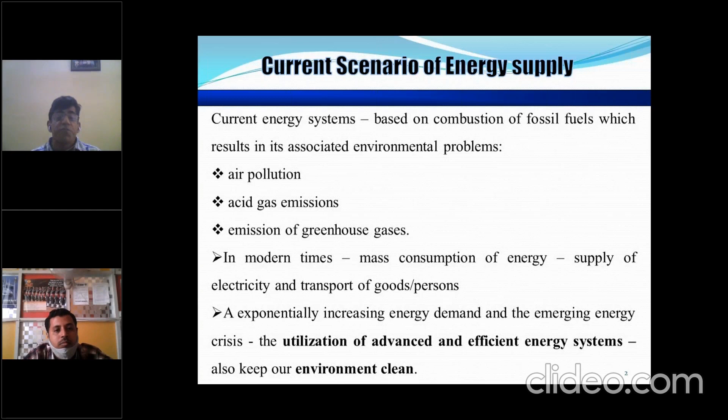So if we just see future fuels and electricity, I have classified into two categories. One is now. So now we are using fossil fuels, that is natural gas, petroleum, coal. We are using steam turbines, and we are using some combined cycles involving steam turbines.

So these are for limited usage now, and for the future, because many of these energy sectors which I just told are presently being utilized to some extent. Research is going on for commercializing these particular areas. So for limited usage and future, we have nuclear energy, solar energy, renewables.

Of course, a lot of renewables are being discussed, like wind energy, which is a renewable energy, that's what I discussed in the morning. So we have a distributed generation system, superconducting transmission lines, and other future fuels that can be used.

Then we have hydrogen from fossil fuels and water. Super grid is another concept, that is a transmitted grid over a wide area, so that electricity can be supplied in a proper fashion.

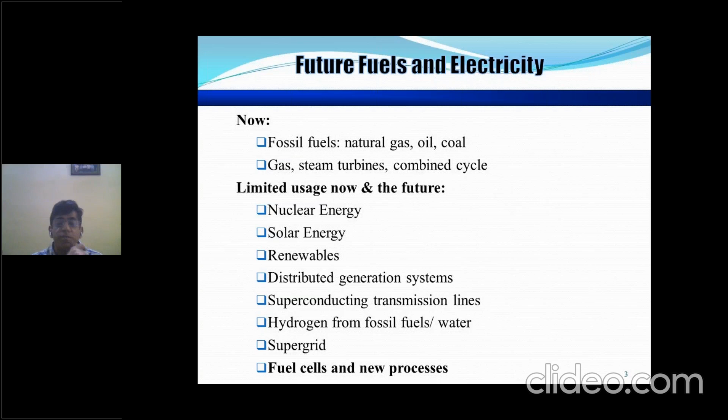So my topic is fuel cells and new processes. We will be talking about this particular topic, fuel cells and new processes. So what are the key drivers for fuel cell technology?

So the key drivers: first is increasing energy supply to meet the growing demand. The energy required is increasing, particularly in developed countries. The amount of per capita energy is increasing at a very fast pace. So we have to increase the amount of energy supply so as to meet the growing energy demand.

Second thing is reducing reliance on imports. Certain countries have an upper hand on oil, and we have to rely on imports for meeting our energy demands. So that reduction is required for oil imports, and for that matter we need fuel cell technology.

Then, of course, a very important parameter nowadays is environmental quality. For improving environmental quality we need reduction of greenhouse gas emissions, and meeting air emission regulations given by the various pollution control boards, those norms have to be met. So for that very reason we have these key drivers for the fuel cell technology.

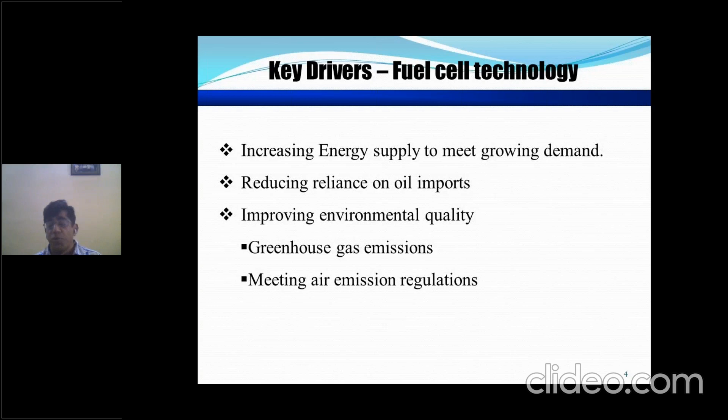Then, what exactly is a fuel cell? Just a straightaway definition: it is an electrochemical device that directly converts the chemical energy from a reaction between fuel and oxygen into electrical energy.

Okay, so what we have? We have chemical energy stored in a fuel, and that chemical energy of the fuel in the fuel cell, through reaction with oxygen, produces electrical energy that can be used. And of course, the only byproduct is water. There is no combustion of fossil fuels involved, so from an environmental point of view, this is a very acceptable fuel cell.

So then, why are fuel cells the emerging energy source? We have the chemical energy of the fuel that, by reaction with an oxidant or oxygen, produces water and produces DC electricity. Of course, if we need AC electricity, that DC electricity can be conditioned to form AC electricity.

So when I talk about an electrochemical device that converts the chemical energy stored in the fuel into electrical energy, another device that comes to mind is the battery. So what is a battery? A battery is a similar device; it also converts chemicals into electricity.

But the battery, you very well know, you use a battery in your car, you use a battery in your Activa or so, and that battery, after long usage, becomes dead and you have to throw it away or recharge it periodically, right? That is finished in the fuel cell. Fuel cells never go dead. The electricity flows out as long as the chemicals constantly flow into the fuel cell.

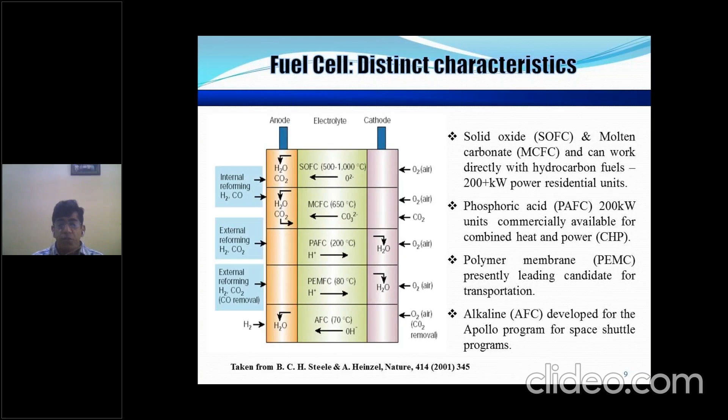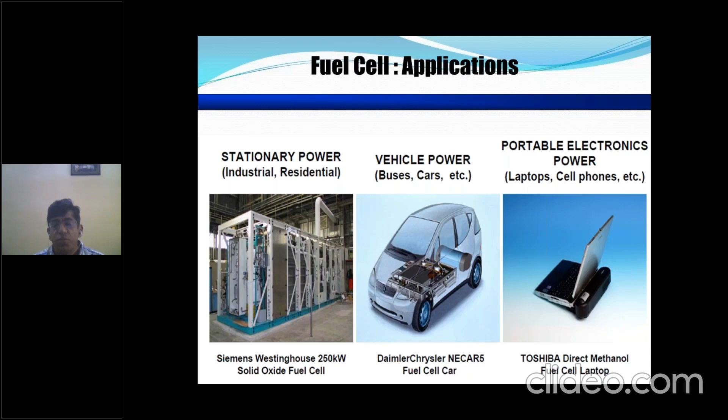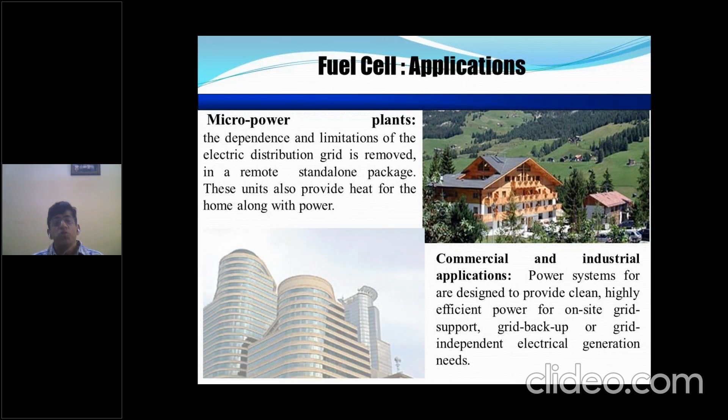Even for commercial and industrial applications, fuel cells are of quite significance. The reason is they provide clean, high-efficiency power for on-site grid support, grid backup, and even grid-independent electrical generation needs. They can be used as backup support or as a complete system for supplying power. Even military applications, where we need uninterrupted power supply systems, can go for fuel cells. So I'm talking about general fuel cells here.

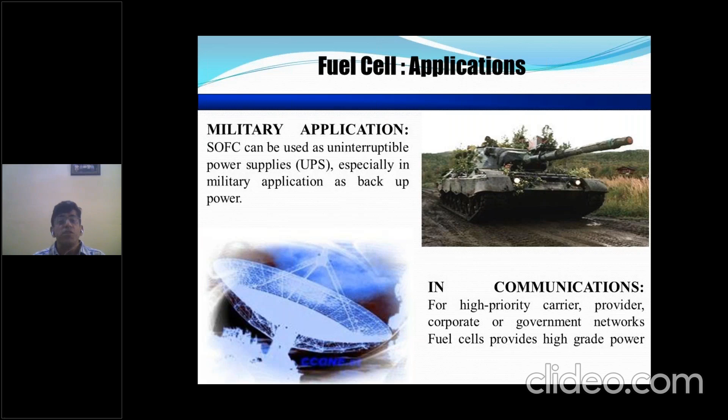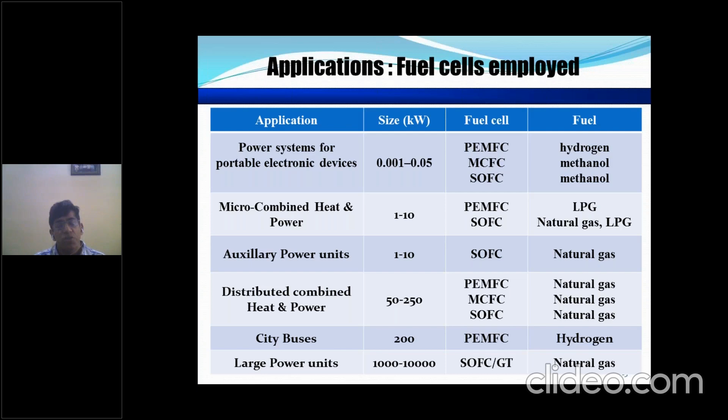So for city buses, we still use polymer electrolyte membrane fuel cells. I mentioned these are mainly used for vehicular applications right now, though the shift has been going towards solid oxide fuel cells in very recent times. For large power units, we can use SOFCs with gas turbine systems, and the most commonly used fuel is natural gas.

So now, why SOFCs over other fuel cells? SOFCs are a type of fuel cell which have an anode, an electrolyte, and a cathode. SOFC is one such type of fuel cell which has all components in the solid state - that is, even the electrolyte used is not in liquid state, it is also a solid electrolyte. That is one distinct advantage of SOFCs over other fuel cells.

For that very reason, it has no corrosion problem because the electrolyte is not a liquid, so there is no corrosion problem. Even there is no leakage because the electrolyte is a solid.

The other advantage is that the only byproduct produced in SOFCs is water. We can have off gases from other fuel cells which may even be harmful to some extent, so they are quite inexpensive.

I will just come to the slide involving the material of construction of SOFCs. Then we will come to that. They can be quite inexpensive, right?

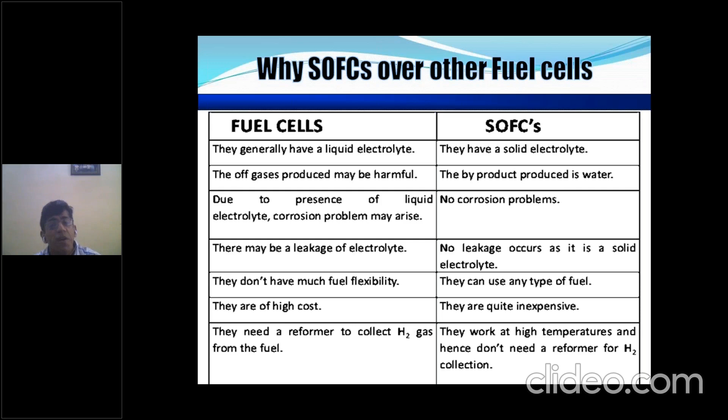The last thing is that they don't require an external reformer. This is because SOFCs operate at high temperature, so the methane or any other hydrocarbon fuel can be reformed in the fuel cell itself. This is referred to as on-board reforming of fuel, forming hydrogen, which is the actual fuel for the SOFC. So there is no pre-reformer required for SOFC. That is also one distinct advantage of SOFCs.

Another slide showing a comparison of various types of fuel cells. If you have a liquid fuel, upon evaporation that liquid fuel can directly be used in solid oxide fuel cells and MCFCs. Why? Because they operate at high temperature, right?

For natural gas, we have to first remove the sulfur content of the gas before feeding it to SOFCs and MCFCs. SOFCs and MCFCs have a thermally integrated reformer because of their high operation temperature, so the reforming takes place within the fuel cell itself.

As we go down, if we come to the phosphoric acid fuel cell, the first thing is we have to convert the fuel into hydrogen. Methane cannot be used as such as the fuel. And the carbon monoxide concentration fed to the phosphoric acid fuel cell should be less than 5%.

Lastly, polymer electrolyte membrane fuel cells require pure hydrogen as a fuel, and for that matter, the carbon monoxide concentration should be less than 10 ppm. So if we go down the series, we have an increasing complexity of the fuel processing, and of course, decreasing efficiency.

I have just shown the efficiency before. The efficiency of SOFCs and MCFCs is greater, right? And further, the other fuel cells require a lot of fuel processing before being fed to the system.

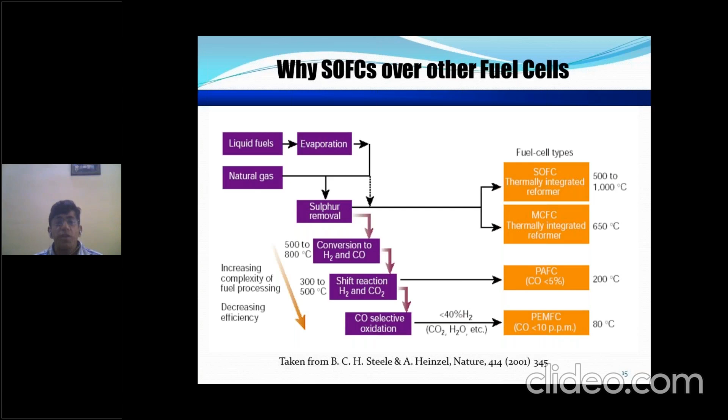So then let's come to the SOFCs, the principle of operation. Just see this diagram here. The principle of operation is very clear to you. I will just briefly tell you that we have an anode.

That is, of course, a solid material. We have an electrolyte, that is also solid material. Cathode is there. So hydrogen as a fuel is fed to the anode, and we have oxygen that is fed, air is fed at the cathode. So the oxygen of the air gets reduced at the cathode and forms oxide ions.

The oxide ions pass through the permeable electrolyte. They reach the hydrogen, react with it, and form water and electrons. The electrons move through the external circuit. This external circuit movement of electrons is basically conventional current moving in the opposite direction, right?

So what we have basically is that the characteristic of the material is such that the electrolyte is an ionic conductor. It allows oxygen ions to pass through them, but it does not allow the electrons to pass through them. That is the characteristic of the materials that has to be chosen for SOFC. Then only it will actually generate electricity, right?

And the excess fuel and the water are just removed from here. So the unused gases are removed on the cathode side also. Now, I told that hydrogen reacts with oxide ions at TPB. It is written that oxide ions migrate through the permeable electrolyte to reach the TPB.

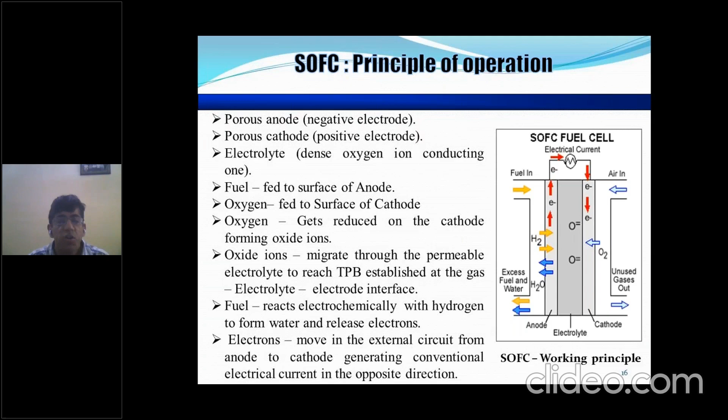There is a TPB, that is the triple phase boundary, where this electrochemical cell reaction occurs, that is the reaction between hydrogen and oxygen to form water. This TPB exists because of the coexistence of the electrolyte, the electron conducting metal phase, and the gas phase that is required. These are the various reactions that occur in a natural gas fueled SOFC.

The basic reactions are that oxygen reacts with electrons to produce oxide ions. The oxide ions pass through the electrolyte and reach the anode, where hydrogen reacts with these oxide ions to form water, producing electrons. These electrons move in the external circuit, leading to the generation of electricity. So the overall cell reaction can be taken as hydrogen reacting with oxygen to form water.

If we have a natural gas fueled SOFC rather than a hydrogen fueled SOFC, we have methane as the fuel. Methane reacts with steam to produce hydrogen, which is the actual fuel for the SOFC. The carbon monoxide generated reacts with steam to produce hydrogen and carbon dioxide, and this is the water gas shift reaction.

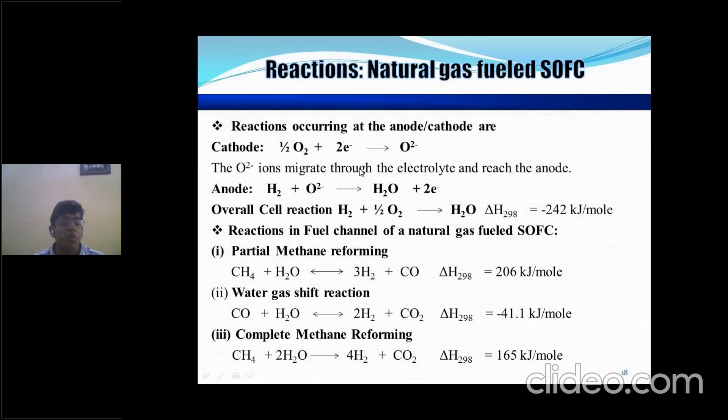We also have a complete methane reforming reaction. If in excess of steam, methane reacts with steam to produce hydrogen and carbon dioxide, and this hydrogen is used as fuel for the overall cell reaction, for generation of the electric current.

These are the typical materials used for SOFCs. The anodic material should be stable, electronically conducting, and porous. Typically we use nickel on yttria stabilized zirconia as a material for the anodic component.

The cathodic material should have high electric conductivity and ionic conductivity. It should have catalytic activity for the reduction of oxygen, and should be chemically and thermally stable, and stable in the oxidizing atmosphere. Typically the material used is lanthanum strontium manganite, that is the LSM layer.

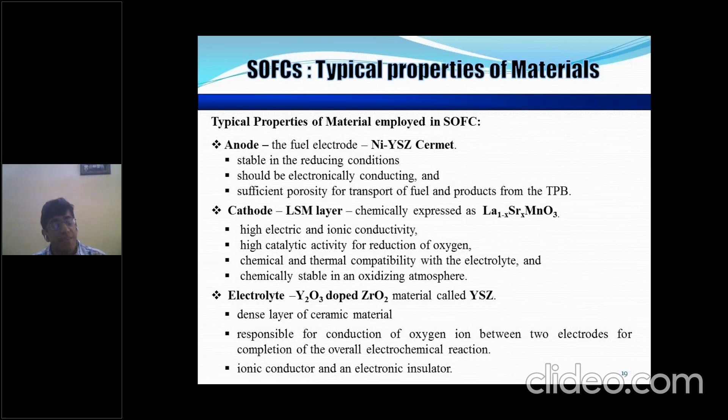The electrolyte has a very good role to play in an SOFC. It is a solid material, but it has a peculiar characteristic: it is an oxygen ion conductor, but an electron insulator. Because of this characteristic, the fuel cell actually generates electricity. Typically the material used for the electrolyte is YSZ, that is yttria stabilized zirconia.

Then we have certain auxiliary materials. Sealing material is there for gas tightness. We need a glass ceramic for sealing the hydrogen from the oxygen so that they don't react with each other initially. And interconnecting materials are there.

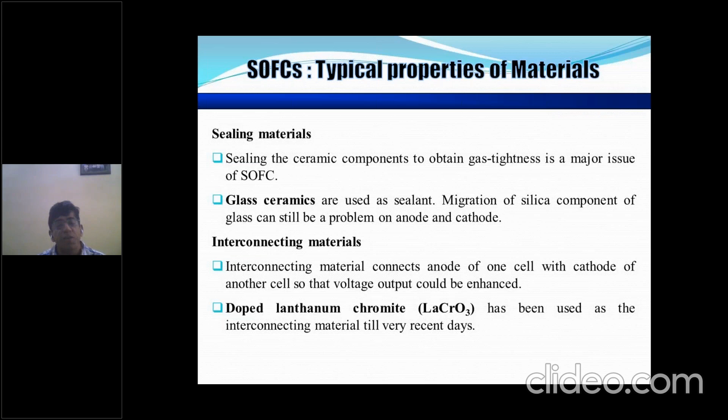For connecting the cells to produce a sizable amount of voltage, we have to have a stack of cells. These stacks of cells can be connected with each other by means of interconnecting materials. Typically, doped lanthanum chromite has been used as an interconnecting material.

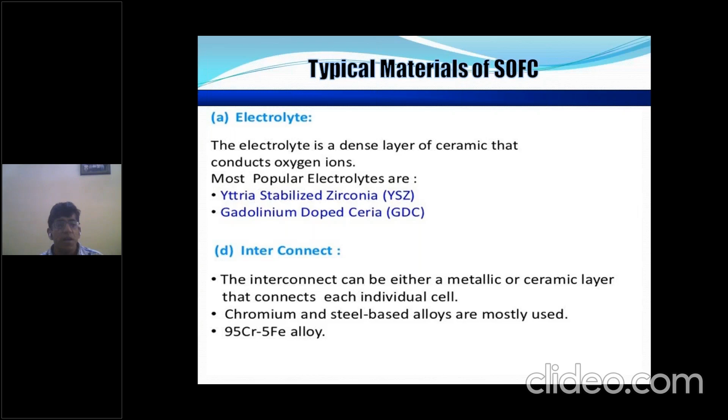For those interested in taking up synthesis as a system for fuel cell research, these are the various techniques traditionally used. Polymeric complexing method and reverse micelle synthesis are techniques that have been used very recently. Solution combustion synthesis I have used in my research work.

I have generated nickel on gadolinium doped ceria by means of solution combustion synthesis. In that case, we normally take nitrates of different materials, that is cerium nitrate, gadolinium nitrate, and nickel nitrate, and add a fuel into it. Glycine as a fuel we add, and upon combustion it produces nanoparticles which can be compressed or pelleted to form a component - anodic component, or even electrolytic component of an SOFC.

Now let's come to the major challenges for SOFCs. First and foremost, it should have good electrical conductivity. Then chemical and thermal stability of the component - the component should be chemically and thermally stable, since they work at high temperature and thermal mismatch may lead to problems. There is also a need for intermediate temperature, high performance electrodes.

Recently there has been research on producing intermediate temperature electrodes rather than high temperature systems. Carbon monoxide should not act like a poison, so there should be carbon monoxide tolerant electrocatalysts. Thermal mismatch between different components should also not be there. And the electrolyte is the foremost thing - it should be a good ionic conductor and electron insulator. Low cost fabrication processes should be there, and novel cheap materials should also be tested for fuel cells.

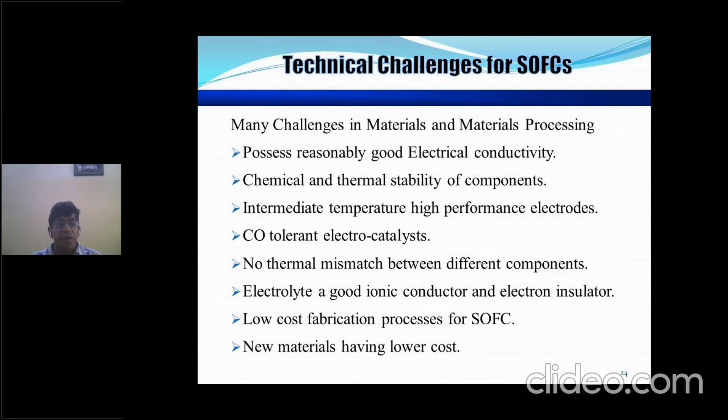So SOFC has distinct attractive characteristics. It has high conversion efficiency - normal conversion efficiency is 50%, employing natural gas as a fuel. But if we use some heat recovery techniques in which waste heat can be used, conversion efficiency can be increased up to 85%.

It has a modular design, so it has no acoustical pollution - no sound is produced during this generation of electricity. That makes it useful for residential electrical purposes, for distributed generation of electricity. There is no chemical pollution either, it only produces water. It can also be used for onboard internal reforming.

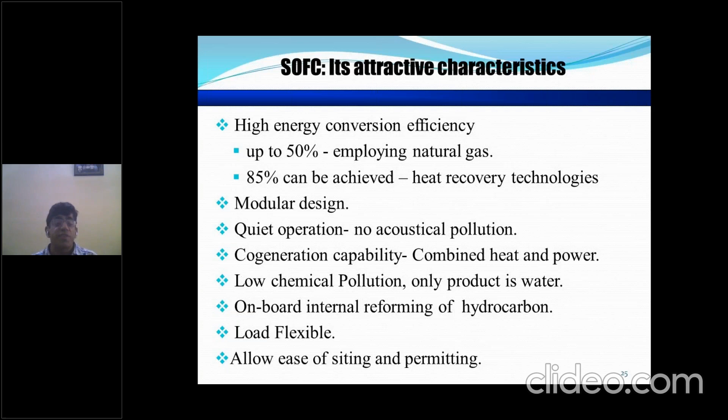This is because of its high operation temperature, so onboard reforming of hydrocarbons can be done. It is load flexible, as we discussed, and it allows ease of siting and permitting. Other attractive characteristics are that some commonly available ceramic materials can be used, there are no moving parts, and there are no corrosive liquid electrolytes.

So it is very reliable and maintenance free. There are no auxiliary pumps required for circulating hot electrolyte. It promotes distributed power generation - rather than having a centralized power system, we can have distributed power generation at our homes, used for electricity generation. For automotive applications, it provides rapid load response, mainly used for providing auxiliary power rather than the main power system.

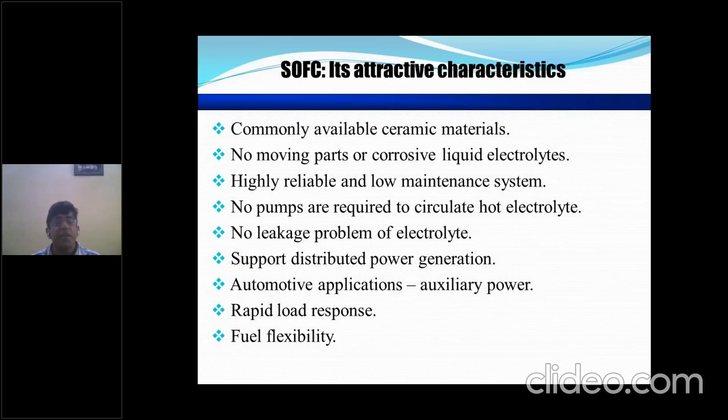So it has fuel flexibility. Let's come to fuel flexibility - I'll talk about the gas species involved: hydrogen, carbon monoxide, methane. Hydrogen is a fuel for all fuel cells, but carbon monoxide is a poison for the phosphoric acid fuel cell and for the polymeric electrolyte membrane fuel cell.

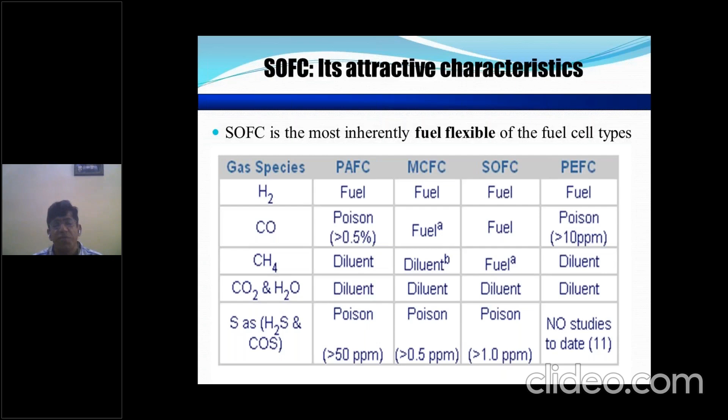Carbon monoxide is a fuel for SOFC and for molten carbonate fuel cells. Methane is a fuel for SOFC, but methane is not a fuel for any other fuel cell type. So it has a large amount of fuel flexibility. Carbon dioxide and water, when present, can act like a diluent. Sulfur, of course, is a poison for all types of fuel systems.

So let's come to fueling SOFCs. These are the various fuels, since it is a fuel flexible system - various types of fuels can be used. Natural gas can be reformed to methane, and natural gas methane can be reformed to hydrogen, which can be used as a fuel.

We can even use LP gas, referred to as propane and butane, as fuel for SOFC - it has a large amount of advantages, with a high hydrogen to carbon ratio. Greater the hydrogen to carbon ratio, greater the amount of hydrogen produced. It also has low vapor pressure, so there's no need for a pump to pump this LP gas.

Even methanol and ethanol have been used as fuel for intermediate temperature SOFCs. There has been some research going on towards using higher hydrocarbons like petrol and diesel for internal reforming for SOFCs, but that is quite complex because they're higher hydrocarbons. So reforming them in the fuel cell itself, that becomes a problem, right?

Renewable fuels like biogas and landfill gas can be used, but again they have a problem in that the sulfur content of these gases leads to poisoning. For that reason, the sulfur content has to be removed before feeding it as a fuel to the SOFC.

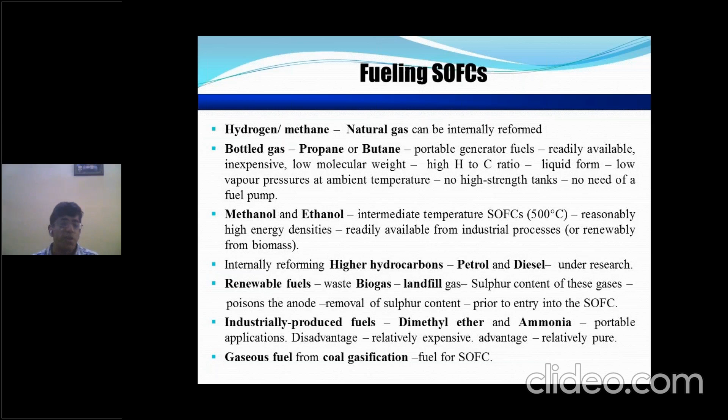Even industrially produced fuels like dimethyl ether and ammonia can also be used, but these are used mainly for portable applications, and the disadvantage is that they are relatively expensive and available only in pure form. The gaseous fuel obtained from coal gasification can also be used as fuel for SOFC. So we have fuel flexibility - a large amount of fuels can be used in SOFC.

Now, when I'm talking about natural gas as a fuel for SOFC, basically we are using a fossil fuel only. Of course, environmental concerns do not permit the use of natural gas as a fuel. So why not use some other ideas where we can obtain hydrogen from sources other than natural gas, or other fossil fuels?

These are the sources of hydrogen production that are there. Besides that, we have electrolysis of water that is cheap and abundant. We have thermochemical production. Then we have even photoelectrolysis, where sunlight can be used for generating hydrogen, but that process has some lower efficiency - normally 1 to 2% efficiency on the photoelectrolysis.

Some new techniques have been developed, and with these new techniques the efficiency has gone up to 4.5%. There is another process known as biophotolysis, which basically leads to conversion of hydrogen as a fuel from algae. That is also some new idea for hydrogen as a fuel.

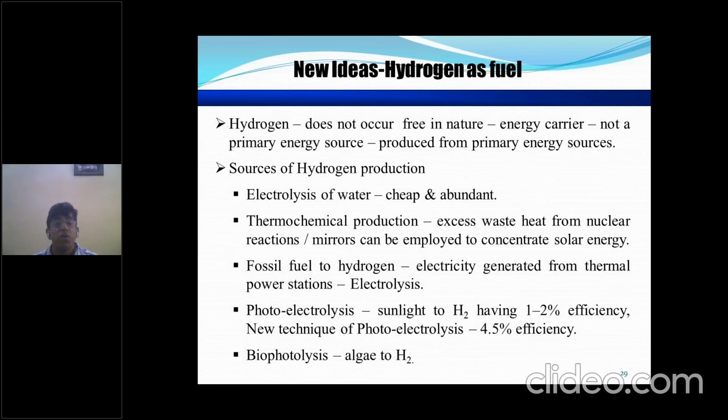Now let us come to hydrogen storage. We also store hydrogen for use in a fuel cell. We need compressed gas tanks, traditional cryogenic liquid hydrogen tanks. We can use metal hydrides, but metal hydrides, as Dr. Amit has said, that is still under discussion. So some hydrolysis reactions can be used for hydrogen storage. Even nanomaterials that can absorb hydrogen can also be used for hydrogen storage.

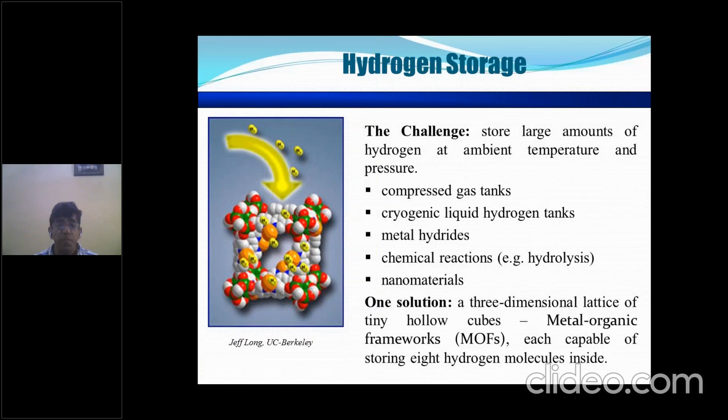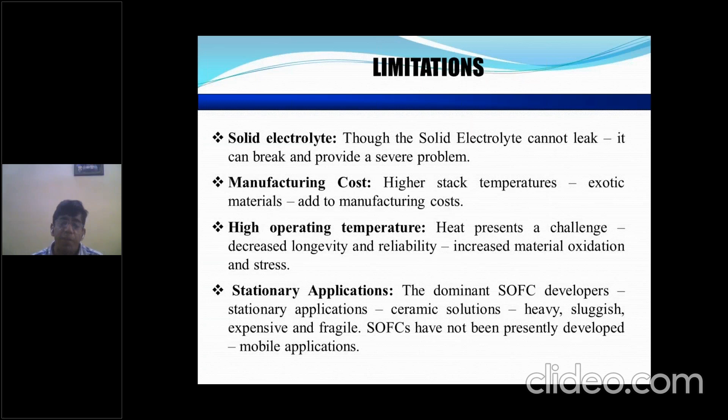So we are using SOFCs mainly for stationary applications, because the materials are heavy, sluggish, expensive and fragile. So SOFC right now has not been used much for mobile applications. We have to go in for some mobile application for SOFCs also.

So this is the thermodynamics of an SOFC. We have fuel that is fed to the SOFC, and an oxidant that is fed to the SOFC, and it results in some amount of work that is generated in terms of electrical energy. There is an amount of heat that is produced by the SOFC, and there is a flue gas and an exhausted oxidant that is there, right?

So if you apply the laws of thermodynamics to it, the first law of thermodynamics just says that the amount of heat plus the amount of reversible work is equal to delta H. So delta H is the enthalpy change - all of you know that. So the enthalpy change is basically the enthalpy change because of the flows term and the enthalpy change which is because of the reaction term.

So then we have the second law of thermodynamics that basically says the entropy change for a closed process is 0. So if we apply that, we get for a reversible process this particular equation.

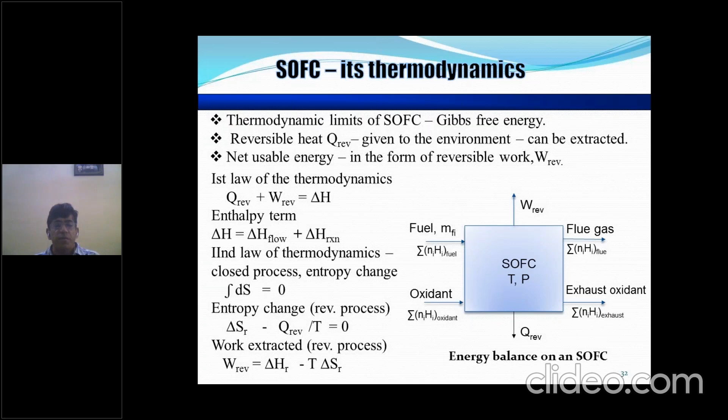Next comes the thermodynamic principle that says the maximum possible reversible work that can be withdrawn from an SOFC gives the free energy change for the reaction. That is the maximum amount of work that can be withdrawn from an SOFC, that is delta HR minus T delta S. And if I talk of thermodynamic efficiency, that is the ratio of delta G by delta H.

So if I just talk about this electrochemical cell reaction, hydrogen plus oxygen gives water. Delta G, that is the Gibbs free energy change for the reaction, is just the Gibbs energy for products minus that for the reactants.

Now let's come to the basic reaction of the cathode and anode. Oxygen reacts with electrons to form oxide ions, and oxide ions react with hydrogen to form water. So if I just see from these two reactions, the molar flow of electrons is twice the molar flow of hydrogen. So the electric current is a linear function of the molar flow of electrons.

And we have a term known as Faraday's constant. Faraday's constant refers to the charge on 1 mole of electrons. So we have this as the charge E, that is minus delta GR by 2F.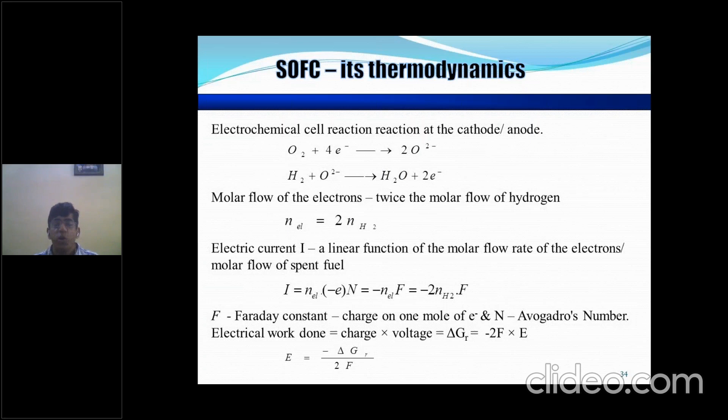So I define an equation known as the Nernst equation. The Nernst equation shows the basic working of a fuel cell, based upon the reactant pressure, temperature, and its concentration. The Nernst equation says that the Nernst potential developed by an SOFC is the standard Nernst potential plus RT by NF, where N is the number of electrons, F is the Faraday's constant, P is the pressure, and X is the mole fractions for hydrogen, X hydrogen, X oxygen, and X water.

So the SOFC generates some electrical energy, but there are certain irreversibilities in the system. These irreversibilities are activation polarization, ohmic polarization, and concentration polarization. These polarizations lead to a decrease in the voltage that is developed.

So what is activation polarization? That results from the resistance of the reactions occurring on the electrodes. Ohmic polarization is because of the resistance of the electrons and the resistance of the ionic flow.

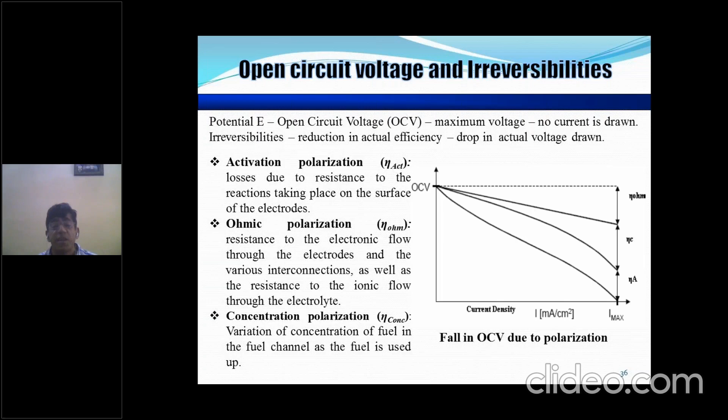And the concentration polarization - as the reaction occurs in a fuel cell, the concentration is going to change from point to point within the fuel cell. Because of this variation in concentration, there is a concentration polarization effect that leads to a decrease in the voltage that is produced.

So the net voltage produced is given by E0 Tp, that is the Nernst potential minus the amount of polarization losses - the activation polarization loss, the ohmic polarization loss, or the concentration polarization loss. So the electric power produced will be just the voltage, the E cell that is produced, into the current.

So there are two parameters here. One is the fuel utilization coefficient that determines the efficiency of a fuel cell system - basically the ratio of the amount of fuel that is actually utilized to the amount of fuel that is fed, so XH2 inlet minus XH2 outlet by XH2 inlet.

We also define fuel cell efficiency by this particular relationship.

So for those interested in modeling and simulation - yes, am I audible? Okay, fine. So for those interested in some modeling and simulation principles of SOFC, which I have also done some research work regarding modeling and simulation.

So there are some governing transport equations. Basically there are two things in an SOFC: one is the flow channels through which the fuel flows and the oxygen or air flows, and second is the electrodes, which are porous in nature. So there are 4 transport equations for flow channels: the conservation of mass, the conservation of momentum, the species balance equation, and the energy equation present for the flow channels, as given in this particular slide.

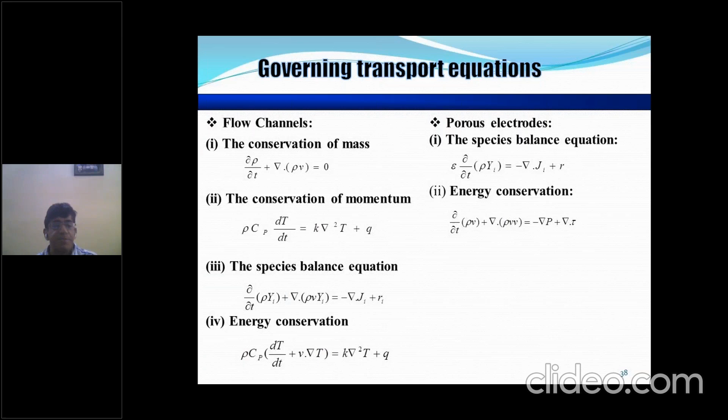So let's now come to the flow of heat. Because these are solid materials, there is flow of heat by conduction. In the flow channels, there is flow of heat by convection, and because of the reactions and high temperature, there is some radiation amount of heat also there. So I have just given a brief outlay of the flow of heat in the system.

The exothermic reactions are a heat source. The exothermic reactions are the electrochemical cell reaction and the water gas shift reaction. The reforming reactions are rather endothermic reactions, and they tend to balance the heat generated by other reactions.

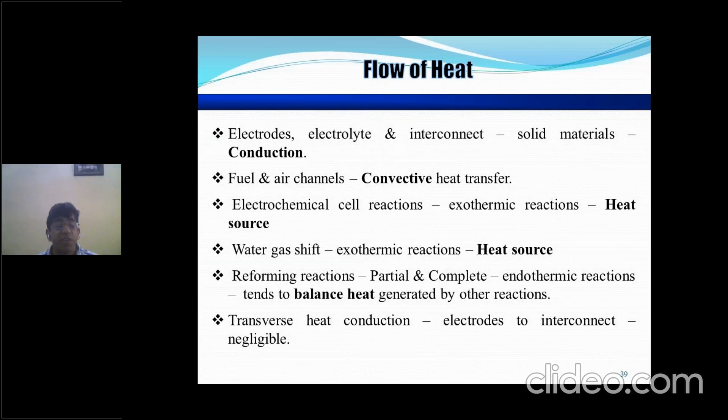So just a slide showing the various flow of heat for different types of heat - conduction, convection, and radiation. I am just rushing through because the time is going up. This is the conduction, which is mainly in the solid region of the fuel cell. This is the planar SOFC conduction.

Then the convection occurs from the solid region, which is at high temperature, to the channels - that is the flow channel shown by blue, shown in these red arrows here. So convection takes place in the fuel channel, it takes place in the oxygen channel.

Then the radiation heat transfer occurs, because it is at very high temperature - normally we have temperature of 800 degrees centigrade. So radiation heat transfer has a role to play for that matter, occurring from the solid region to the channels.

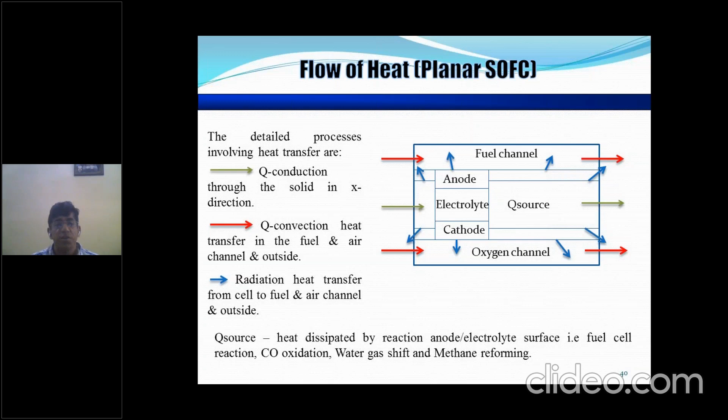So if we come to the design of SOFC, there are basically two designs: one is the planar configuration and the tubular configuration. The tubular configuration has an advantage that it has a self-sealing mechanism - a tube is there, we can feed the oxygen or air to the center and hydrogen at the periphery, so there is a self-sealing mechanism for a tubular SOFC.

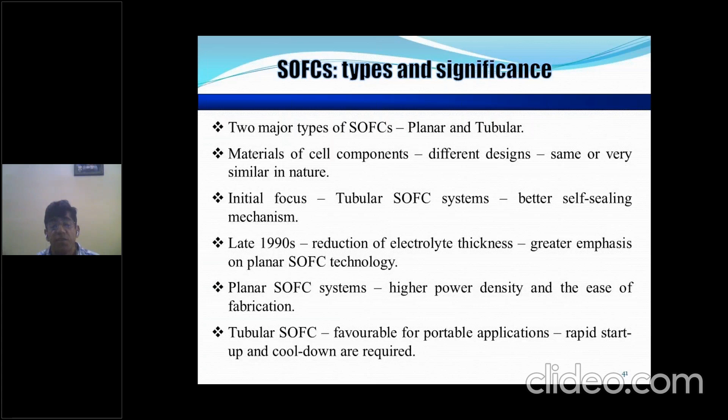So this is now a tubular SOFC. It is made in the form of a long tube with a porous wall, and there is an electrolyte sandwiched between two electrodes. And just see the stack of tubular SOFCs that is there.

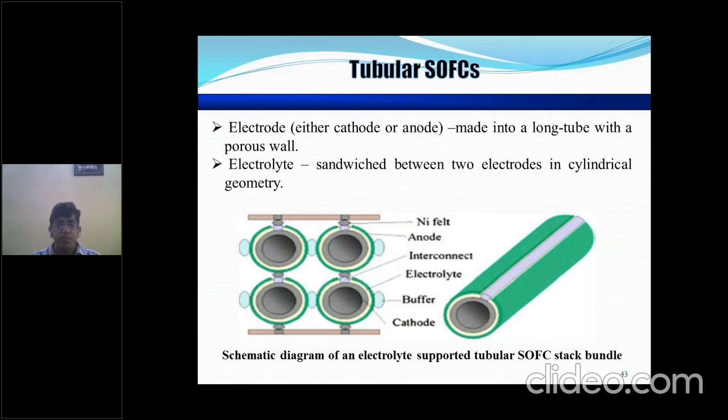So I will not go into detail about the design. We have basically three elements: one is the anode, cathode, and electrolyte. So we can have an anode supported SOFC, an electrolyte supported SOFC, and a cathode supported SOFC. When I say supported SOFC, that means the one which is thickest.

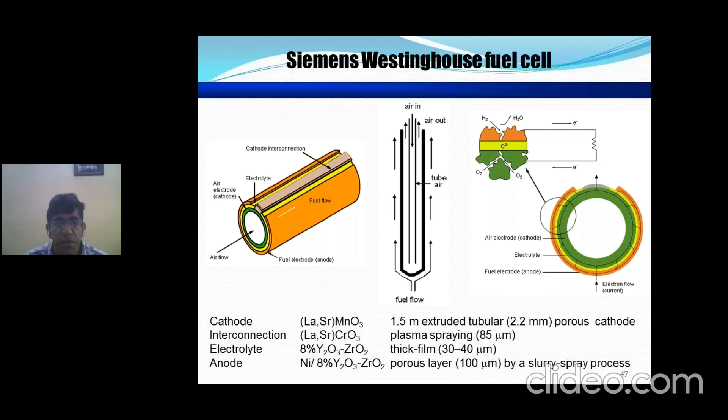So this is the Siemens Westinghouse tubular SOFC that has been developed in Pittsburgh, Pennsylvania, and it is the first SOFC built coupled with a gas turbine system. It is a 220 kilowatt power plant, and it converts nearly 60% of the energy contained in the natural gas into electric power.

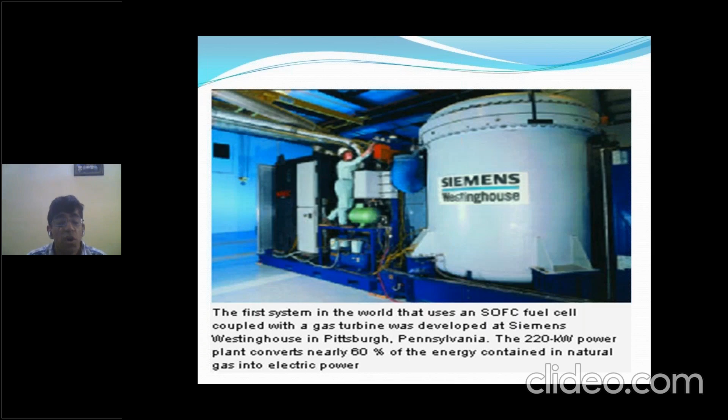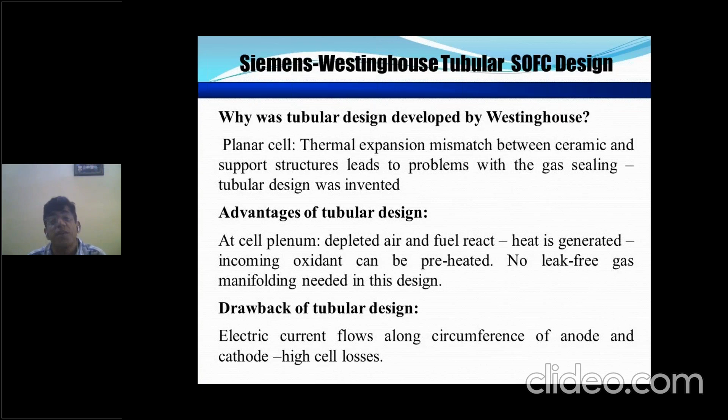So why did Siemens Westinghouse generate this tubular SOFC? One reason was it has a self-sealing mechanism, so thermal mismatch was avoided. Of course, there is a drawback: there is a long electric current pathway that has to pass through the SOFC. For current flowing over a larger distance, the amount of resistance will be more, and some reduction in the voltage produced may also occur.

So to overcome this, Siemens Westinghouse generated a tubular SOFC with a high power density design. In this design, ligaments were present in the cathodic section, which was made flat. These ligaments tend to decrease the ohmic resistance by flattening out the SOFC, basically decreasing the path of the electrons for completing the circuit. That is the main advantage.

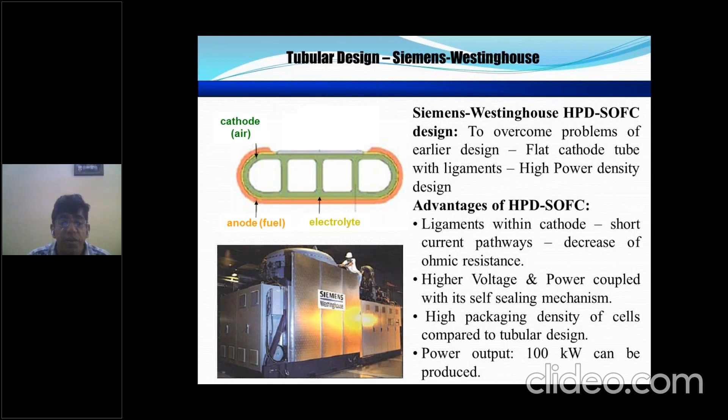Moving to the next slide: another design is the planar design by Sulzer Hexis. Some advantages are given - it is easily stacked and has no long current pathways, so fabrication techniques are very easy. Screen printing and tape casting are typical fabrication techniques that have been employed.

Some demerits are there too - there is a long-term stability issue, and it requires optimization of the mechanical and electrochemical stability of the materials. The materials used are somewhat similar to those employed for the other SOFC. Fabrication techniques and thicknesses are given here.

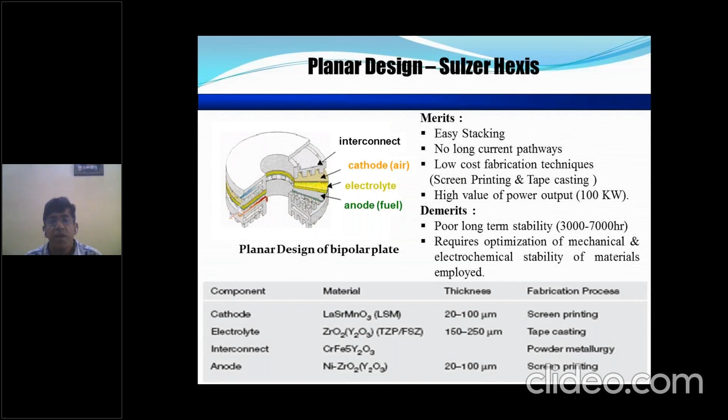This slide shows the stacking of SOFCs. We can have a flat plate design involving different plates connected with each other by means of an interconnect. We can have a sealless tubular design. We can have a segmented cell design, which is basically a tubular cell but fragmented into segments so as to decrease the ohmic resistance. And the latest design is a monolithic design.

The monolithic design is a new technology, consisting of V-shaped curvatures in the plate of the fuel cell component, which leads to pathways for passage of air and fuel through the SOFC. I will not go into detail about this.

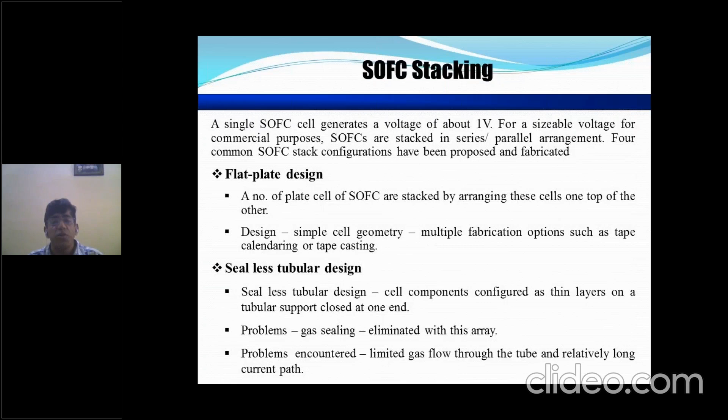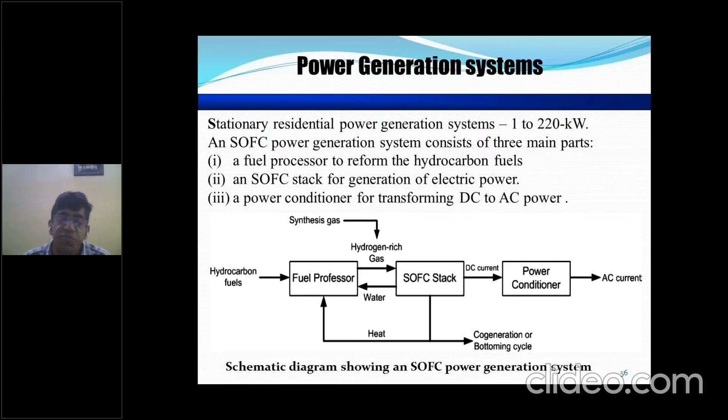Let's come to the applications of SOFCs. SOFCs are used for power generation systems, with mainly three components. First is the fuel processor - we feed a hydrocarbon fuel, and the hydrogen-rich gas, after processing, is fed to the SOFC stack. The SOFC stack generates water and produces DC electricity, which is fed to a power conditioner, from which AC current is withdrawn.

Another modification of simple electricity generation by fuel cell is SOFC CHP, that is combined heat and power system. In this, the waste heat from the fuel cell is used in the afterburner, and fed to the reformer and the preheater. The preheater can be used for preheating the fuel and air fed to the fuel cell, which increases efficiency. The efficiency for a traditional fuel cell is 50%.

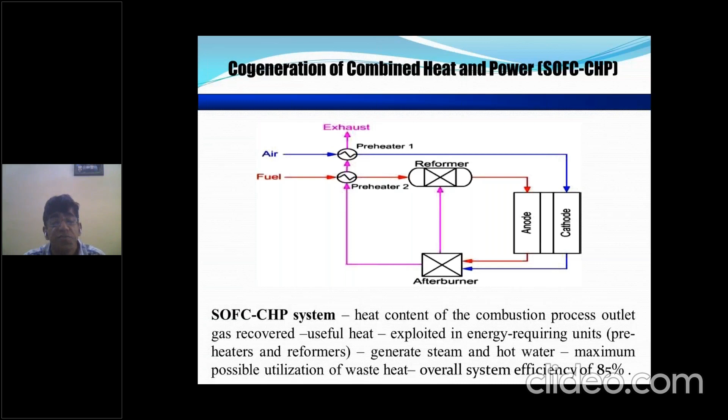This increases the efficiency up to 85%. So then we have the SOFC with gas turbine system. In this system, the gases leaving the fuel cell are fed to the combustion chamber in the afterburner. When these gases undergo combustion, they are fed to a turbine and drive it, and the turbine is used for generation of more electricity. This is co-generation of SOFC with a gas turbine system, referred to as the SOFC-GT system.

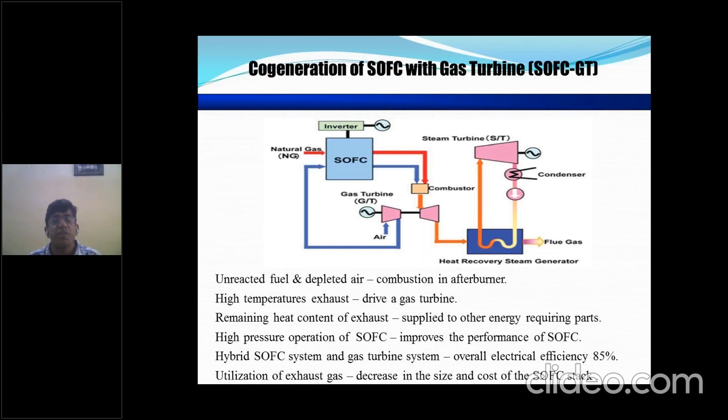As a chemical engineer, I had some interest in this. Of course, not much research is done regarding this right now. But besides the production of electric power, co-generation of chemicals is also possible with certain fuel cell systems. So what is that exactly?

These are the various commercialized stationary power plants that have been installed in a number of places. I'm just going to detail about this particular slide.

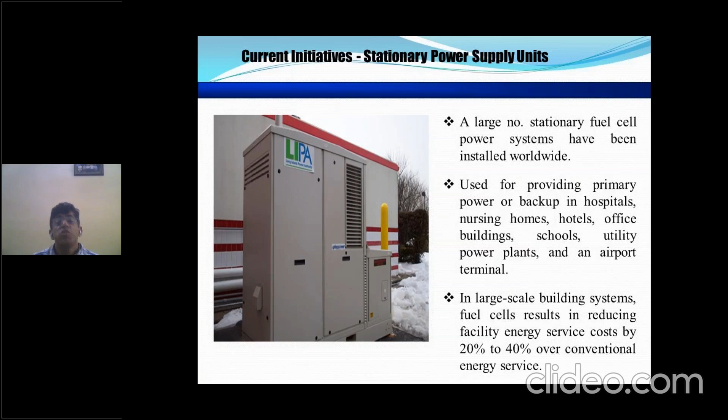If we want a distributed power generation system, that is, if I want an SOFC or fuel cell for household purposes, for residential use it will be just a small fuel cell, about the size of a deep freezer or a furnace. As shown here, a small residential fuel cell costs around $5,000 to $10,000.

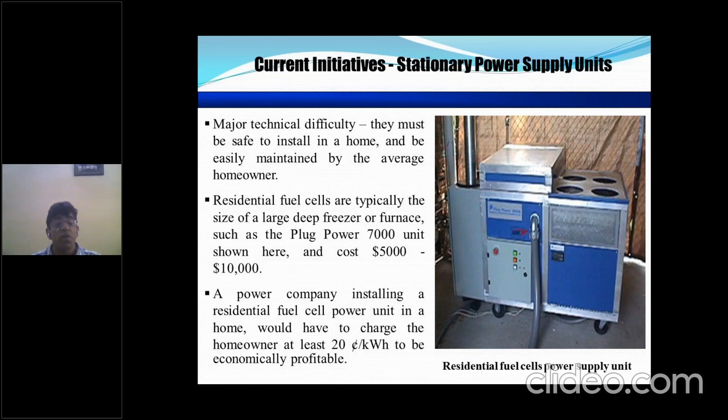If we look at the cost analysis, this is some data taken from the USA where this has been developed. The homeowner is charged about 20 cents per kilowatt hour of the electricity generated.

Now let's come to the transportation sector. Traditionally, it is the polymer electrolyte membrane fuel cells which are used for transportation. Fuel cells can be used for clean diesels, gasoline electric hybrids, and hydrogen internal combustion engines. They can also be used for hydrogen fuel cell vehicles.

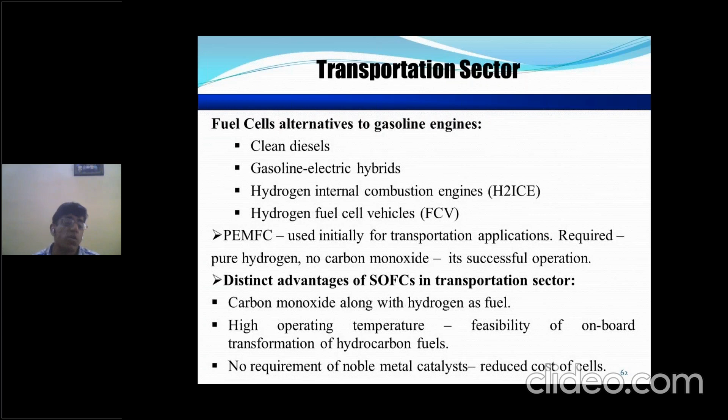SOFCs for the transportation sector are advantageous because carbon monoxide can also be used along with hydrogen. Higher operation temperature leads to onboard transformation of hydrocarbon fuels. Further, no noble metal catalysts are required for SOFCs in transportation.

This is a typical line diagram of how an SOFC can be used in motor vehicles. Hydrogen is fed to the fuel cell stack, which basically goes into a motor controller connected to a battery. This generates power which can be used to recharge the battery and give power back. This goes to a motor generator and powertrain, which produces the power for a motor vehicle.

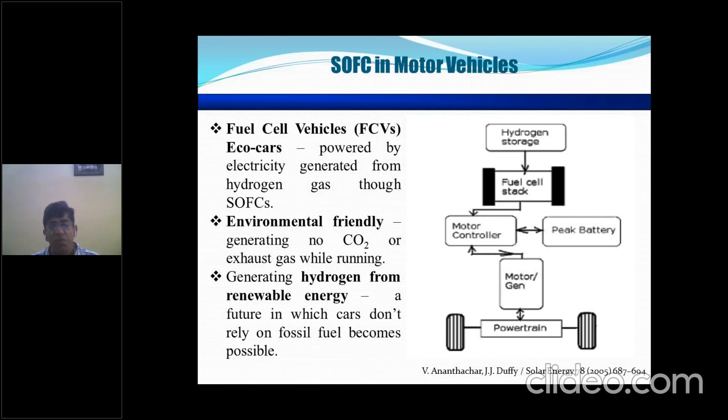Honda company is looking at a vision for making fuel cell vehicles. Traditionally it was internal combustion engines that were used. Now the technology has moved to hybrid systems, that is hybrid fuel and electricity systems. Then we have PHEVs, plug-in hybrid electric vehicles. And fuel cell vehicles represent zero emission technology being proposed by Honda.

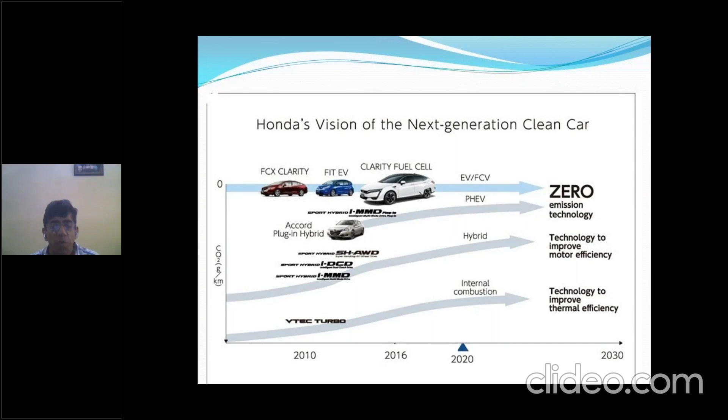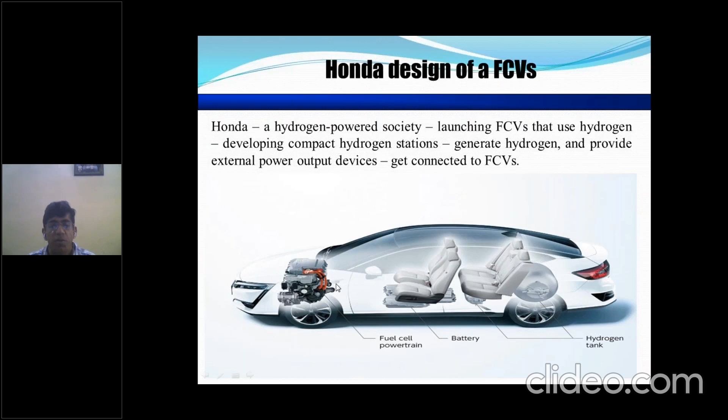Right now Japan is making great developments in the use of fuel cell technology, making hydrogen easily available at commercial fuel hydrogen stations at different locations in metropolitan areas. Honda has developed one smart hydrogen station. These are compact smart hydrogen stations - just see the small size of the smart hydrogen station that can be used for feeding hydrogen to these cars.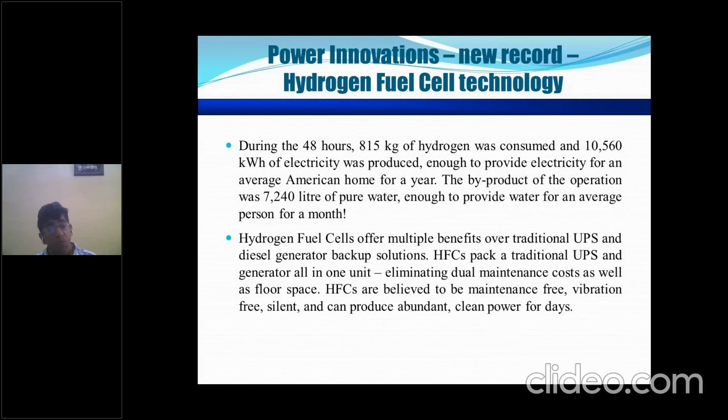So what are the barriers to fuel cell technology? First, it should be made affordable. I gave you an idea about the cost of the residential fuel cell. They should be made affordable, then durability should be there, the fuel supply should be there, and precious metals are used as catalyst, which is also a barrier.

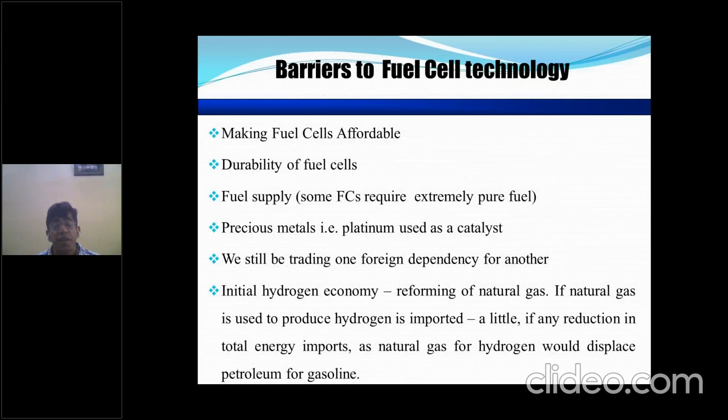So we are still trading on foreign dependence. How? Rather than using petroleum as fuel, we are using natural gas as fuel. So again, if we're using natural gas for hydrogen as a fuel in the SOFCs, we are still depending upon foreign dependency.

Although fuel cells only emit water, the internal reforming of the fuel cell produces NOx that leads to smog. Hydrogen, when stored in cylinders, with abrupt leakage may lead to reduction in global oxidative capacity, and increased tropospheric ozone may be formed, inducing halogen induced ozone losses. So what is required is the hydrogen economy.

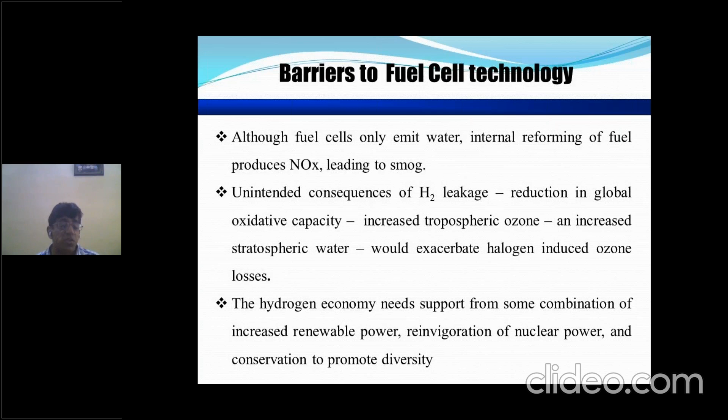It needs support from some combination of increased renewable power, revitalization of nuclear power, and conservation to promote diversity. These are the factors towards addressing these barriers.

There have been widespread fuel cell vehicles demonstrated in these two instances reported here. Fuel cells have been used for stationary power backup systems, and these are public-private partnerships developing alliances and certain goals for generation of electricity through pollution-free fuel cell systems.

So SECA, that is Solid State Energy Conversion Alliance, is one; Office of Fossil Energy is there; National Energy Technology Laboratory is there; Fuel Cell and Hydrogen Energy Association is there. These are the various associations dealing with fuel cells right now, weakening the barriers involved in fuel cell technology.

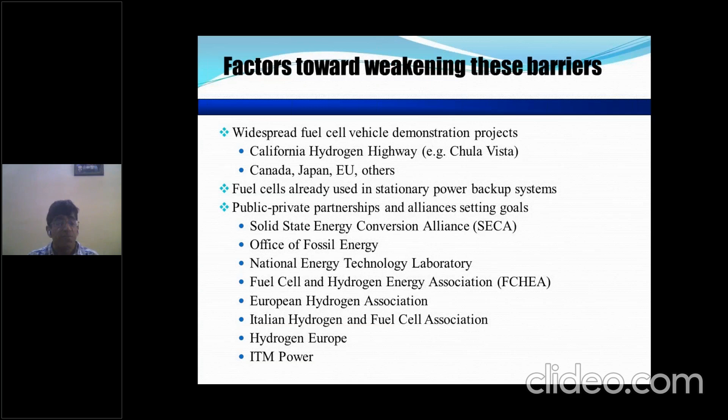So thanks for your patient hearing. Of course, the network was a big issue - there was a problem regarding the network, and again some interruption was there. I regret that. So any queries regarding that?